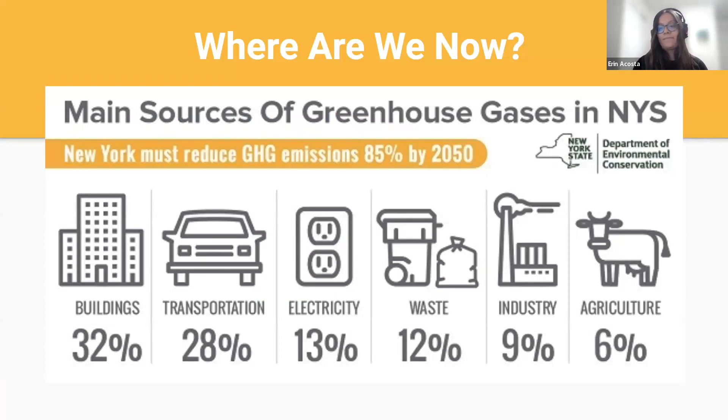So there are a lot of benefits of HeatSmart Southern Tier. For you, it'll allow you to reduce your energy costs, as well as improve your home comfort and safety. And then for your community, it allows you to reduce overall greenhouse gas emissions and increase awareness in programs like HeatSmart. And there's also the possibility for grant funds for your community through Clean Energy Communities.

So Clean Energy Communities is another NYSERDA program that encourages municipalities to be more sustainable in exchange for rewards. If communities implement green improvements, such as signing up for heat pumps or for solar energy, that can translate to points. And then those points allow you eventually to get financial awards from the state. So something that we can do is help you find if there is a Clean Energy Communities program in your municipality.

So the HeatSmart Southern Tier program covers weatherization, which is the process of protecting your home against the elements and improving its energy efficiency, as well as ground source heat pumps, air source heat pumps, and heat pump water heaters.

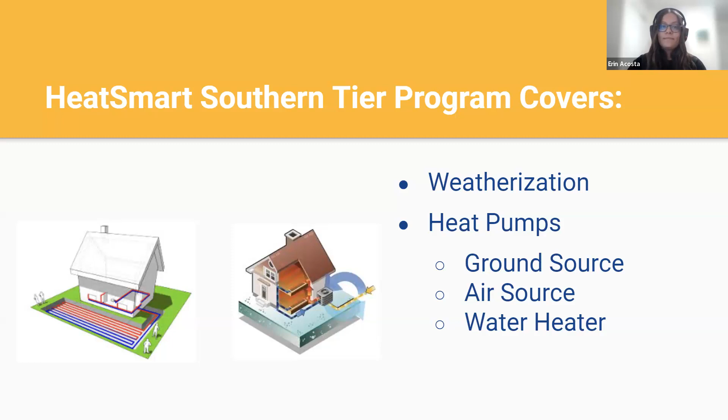So, sorry about that. So yes, first step if you choose to participate in the HeatSmart program is weatherization. Weatherization is the practice of protecting a building and its interior from the elements and modifying a building to reduce its energy consumption and be more energy efficient. If you were to get a heat pump, it's important to ensure that your home is properly insulated first, because heat pumps just work better in properly insulated homes. Next slide, please.

So here we have a graphic showing why having a properly insulated home is key to energy efficiency. Leaks tend to occur in areas of a home where insulation is lacking, which is why having a tighter seal around your home will save you from using and spending more on your energy bill. The arrows throughout this house depict the most common places where there's air leakage.

Warm air often leaks out of your home through ducts and spaces in your attic, as you can see by the red arrows on the diagram up the top. Outdoor air can also leak into your home through vents and spaces in your basement, shown by the blue arrows. Weatherization combats both these issues of air leakage. So if you have any concerns about temperature regulation, ventilation, air quality, or are dealing with moisture problems in your home, it might be a good idea to look into weatherization.

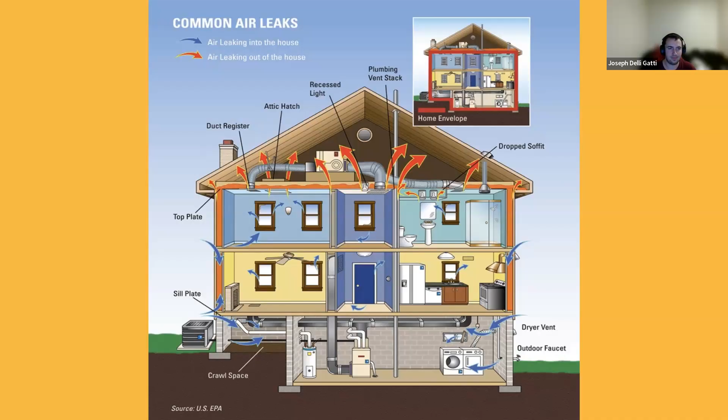Next, please. So what are the benefits of weatherization? Some of the big ones we have here are increasing home safety and comfort. If your home is properly weatherized, it will reduce drafts, improve humidity control, improve indoor air quality, and reduce the risk of ice dams. Weatherization will also help reduce your energy consumption and costs, another big one.

With a tightly sealed home, there's a lower chance that any heat will leak out of your home, and that unwanted cool air will infiltrate it. Overall, weatherization makes your home more comfortable to live in and more energy efficient.

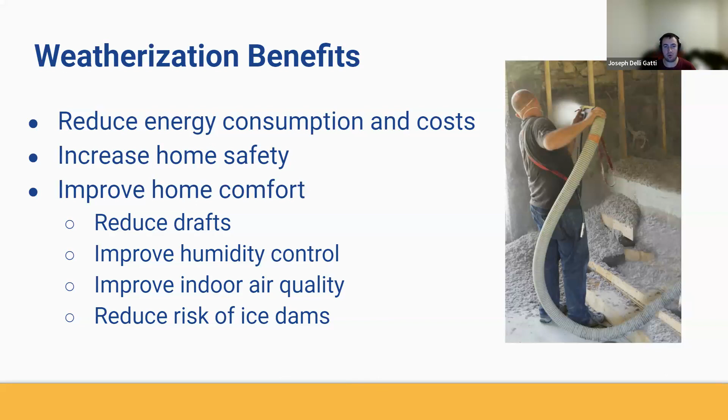So, heat pumps. Heat pumps are an alternative system for heating and cooling your home. While traditional systems such as furnaces use fossil fuels, heat pumps use electricity and offer a more sustainable way to heat and cool your home. So you might be wondering, how does it do that? The graphic here provides a visual of how heat flows through this type of system. And if you have a refrigerator or air conditioner in your home, you already have this type of technology and you might not even realize it.

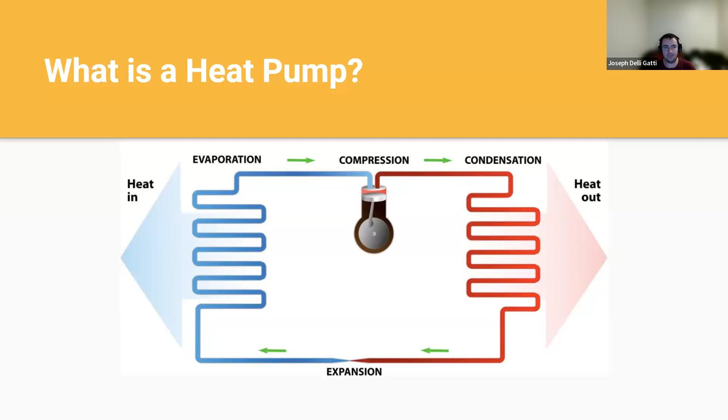So there's heat all around us in the air and in the ground, even during the winter. Heat pumps transfer heat into a space or out of it instead of burning fossil fuels to produce new heat. A heat pump uses technology similar to, like I said, a refrigerator and air conditioner. It extracts heat from a source, such as the surrounding air, geothermal energy stored in the ground, nearby sources of water, or even waste heat from a factory. It then amplifies and transfers the heat to where it's needed in your home. Next slide, please.

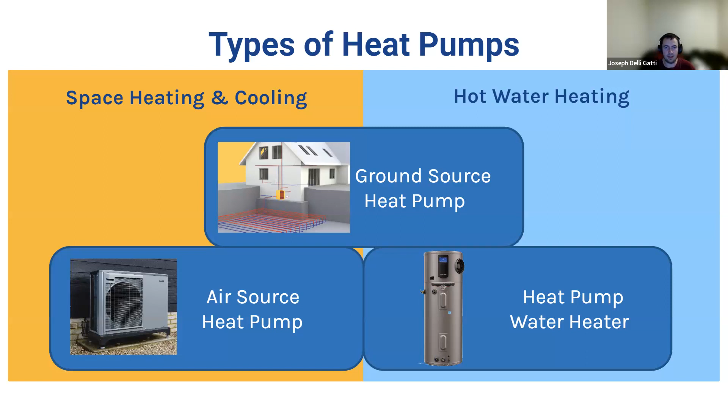So there are three main types of heat pumps that we will be covering here: ground source, air source, and heat pump water heaters. Ground source heat pumps, as well as heat pump water heaters, can be used to heat domestic hot water too, which we'll get into more in just a bit. So, ground source heat pumps. Ground source heat pumps are also known as geothermal, if you're familiar with that term as well.

Usually about 6 feet below the ground, you have a very stable temperature, and geothermal systems circulate fluid in pipes below the ground to transfer the warm energy from the ground into that fluid. Heat is then concentrated through electricity and compression, and then circulated through your home. During the summer months, it works in reverse, and it transfers the warm air in your home back into the ground through the same methods.

As you can see, there are two different types of closed-loop ground source heat pumps. You have horizontal loops, seen on the left, and you have vertical loops, seen on the right. Generally speaking, the horizontal loops are more common, simply because they're more affordable to install, because there's obviously less digging, because the coils are closer to the surface. To know what type is best for you and your home, it's important to get an energy assessment first.

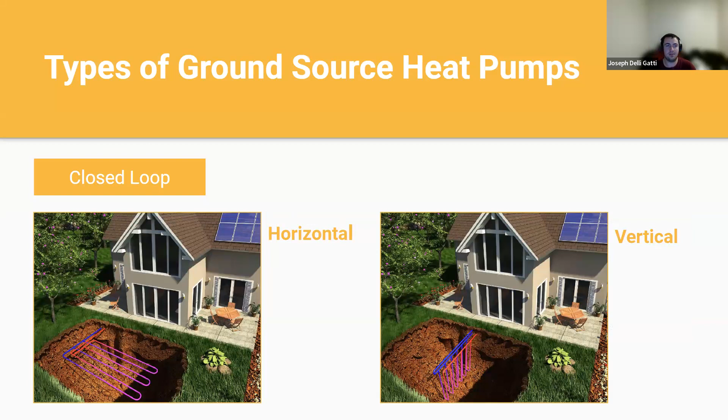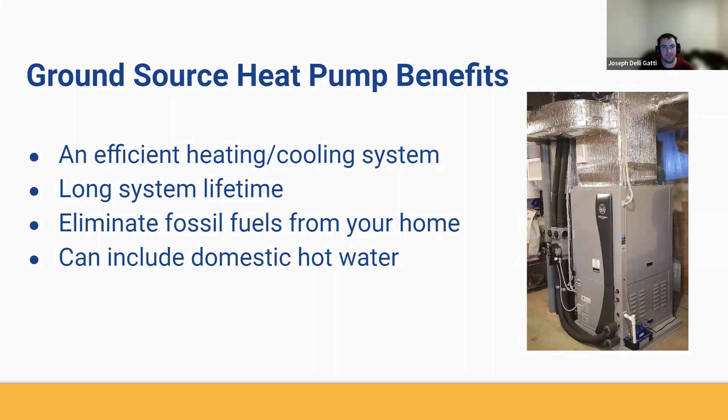Next slide, please. So we have some of the benefits of ground source heat pumps. There are many of them, but some of the big ones are the positive effect on the environment, your energy bill, and your home. The system's also very efficient in heating and cooling your home, which means lower energy bills. Yay. It's long lasting. It removes fossil fuels from your home, and it can heat water in addition to heating your home. Next slide, please.

All right, next we have air source heat pumps. The other type of heat pumps are air source heat pumps, and those work similarly to ground source, but they take heat from the air and pump it into your home. They're typically a ductless system, and they don't require underground pipes like the ground source heat pumps do. It allows for relatively quick and easy installation.

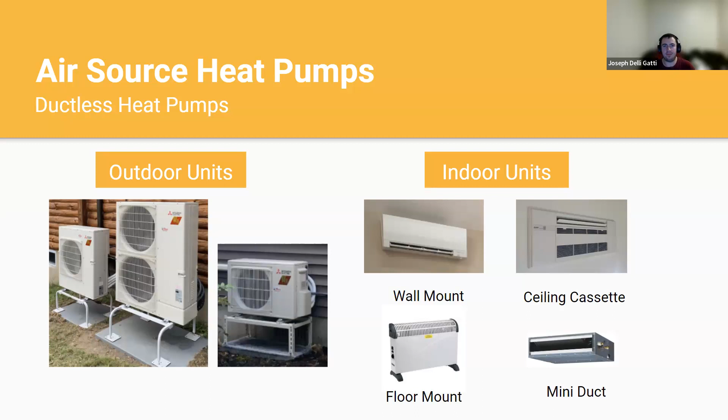Air source heat pumps usually consist of one outdoor unit, which is then linked to more units inside your home. These units come in various styles, as you can see here on the pictures we provided. It's meant to basically fit the aesthetic and cost preferences of your project. They operate similarly to an air conditioning unit. However, they can also run in reverse to provide heat. Next slide, please.

So, benefits of air source heat pumps. Similar to ground source heat pumps, this type of system allows for energy savings, which I know is a big one for people. They're also very flexible because you don't have to replace your entire heating system if you don't want to. It allows for zone control in your home. So you can get just 1 or 2 heat pumps and then use them for a couple of rooms, for example. This can also allow you to have air conditioning without ductwork and to maintain different temperatures in the different rooms in your home.

You can also get a full heating system replacement if you'd like. It's just not always necessary. Lastly, these heat pumps are known to be very quiet, which is another awesome thing about them.

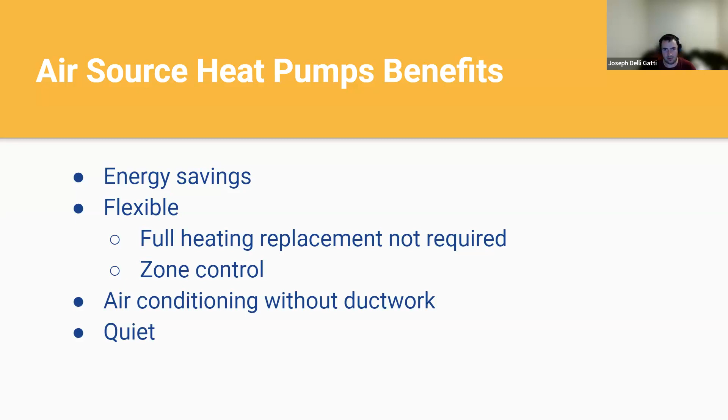All right, and then we'll come up on the heat pump water heaters. So heat pump technology that we've been discussing can also be used to heat your water. Heat pump water heaters are basically an electric water heater with an air source heat pump on top. They use indoor air to heat the water and usually have a backup system to meet high demands if, say, you have a lot of people who take hot showers at the same time in your household.

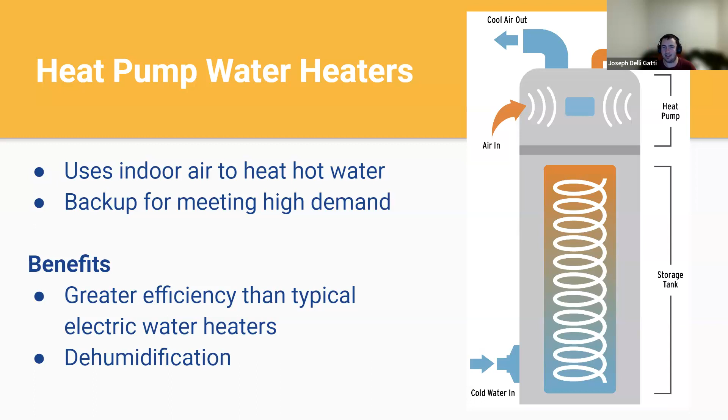Next slide, please. So now I will pass it off to Jackie to discuss the incentives and financing with you. Hello, everyone. I'm Jackie. Thank you, Joe, for covering all the technologies. But we can jump right into it.

Let's start first by looking at the financial rebates for all of these technologies. So these rebates basically take off of the project cost. It's not money that you get back after putting out for it, but things that will basically just be paid for by either NYSEG or the state instead of you.

So as you can see in the NYSEG column, they offer 3 rebates for air source heat pumps, ground source heat pumps, and heat pump water heaters for different amounts, as long as your improvement qualifies with their criteria. All of the competitively selected partners that we have are NYSERDA approved, and they'll make sure that your project qualifies for this, so that's not anything you have to worry about.

But there's also the New York State rebates. So if your household is making less than 80% of the average median income, you qualify for the low income rebate. So you can get 100% off up to $8,000 for your air source heat pump installation, and you can also get 100% off for your water heater.

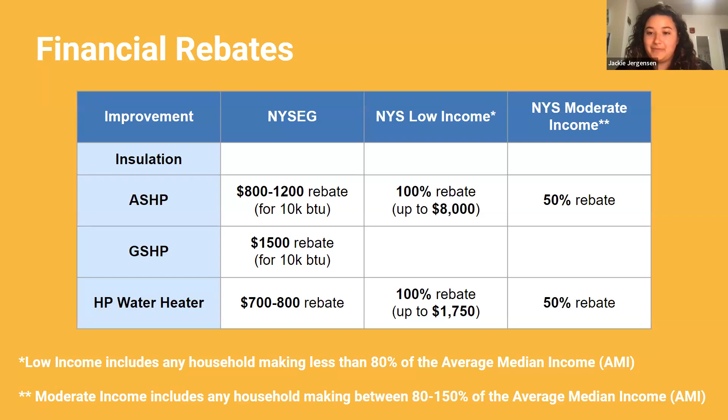But even if you make more than 80% of the average median income, you may still qualify for the moderate income and get a 50% rebate on your project costs. And we will talk about how to know if you qualify later on.

But there's also tax credits that are offered for these programs. So the IRS offers a 30% tax credit for weatherization or your insulation, air source, ground source, and heat pump water heaters. So 30% of the project costs for any of these can go towards your federal taxes. And then for ground source heat pumps, you may also be able to get some tax credit through the state as well. They can give you 25%.

Okay, so now into financing. It's very common that people can't pay the cost of these projects all up front. It can be a good investment, but that is why NYSERDA offers 2 different loans for residents. One of them is the Smart Energy Loan. NYSERDA can loan you up to $25,000 in terms of 5, 10, or 15 years with different interest rates. And they also offer the on-bill recovery loan, which is pretty much the same thing as the Smart Energy Loan, except this is paid directly on your utility bill instead of a separate bill.

You can also look into the manufacturer if you want to finance through them. Sometimes they offer different loans that can be up to 20 years, and you can also go through your local bank.

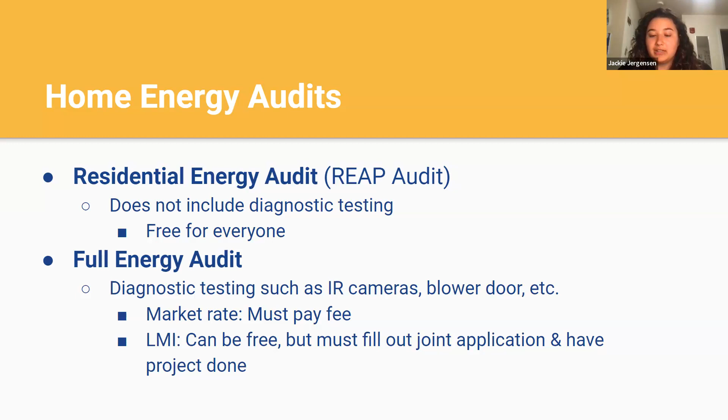For the residential energy audit, they could just come into your home and look at your doors and things that need to be sealed, or if there needs to be more insulation, where things could be installed. And the full energy audit is the more in-depth one. So this one does have a fee, but it can be free as long as you go through with the project if you are low to moderate income.

So just to go over those steps once again, you would first sign up for your home energy assessment through the HeatSmart Southern Tier installer. You can always email us. There's a chance we can sign you up tonight to get in contact with the right people that service your area and your project that you'd like to do. The next thing you would do is receive a quote for your energy improvements. Then you would apply for those incentives and financing and sign your contract for the desired systems, and then you can get your work done.